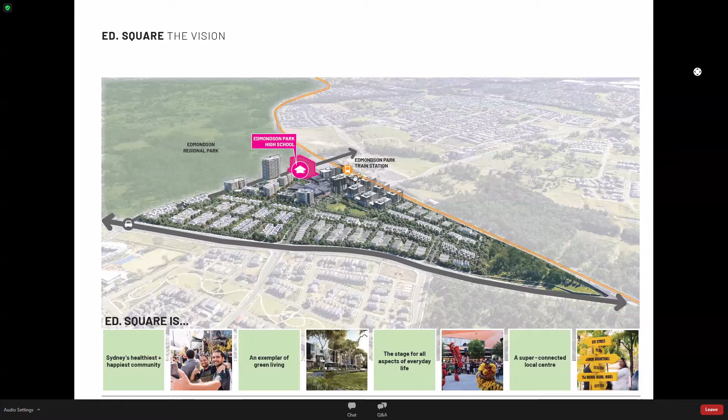I'll start by giving you a summary of the Ed.Square vision for those of you who are not familiar with our overall development. This is a 3D view of the overall master plan. You can see the orange railway line at the northern end of the site with the train station logo, and centred around the train station is our town centre. You can see with the lower level roof area, that's the town centre east, which is the operational retail centre and the apartments above. To the west of that is our town centre west future stage, and in pink there is the potential Edmondson Park High School, which is the subject of the state significant DA that we're here to talk about tonight.

Getting your bearings across the rest of the site, you can see the Edmondson Regional Park off to the western side of the site. And then in the foreground, there's various townhomes and parks that make up the rest of the Ed.Square vision.

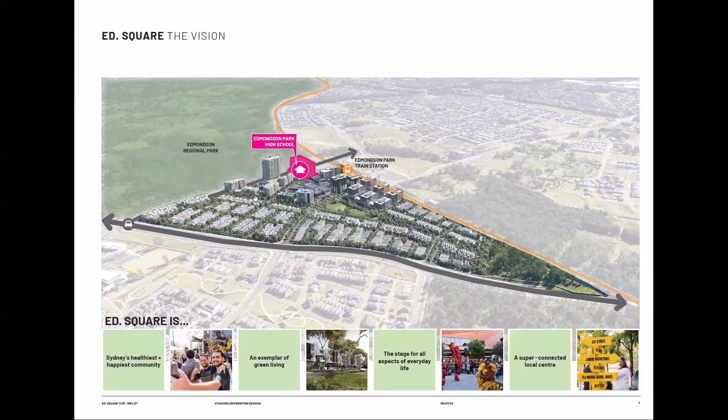Moving on to the next slide, the Ed.Square journey so far. This is the same information from the master plan on the previous slide, with a recent aerial photograph overlaid on top.

You can see here that the town centre east is operational, and town centre west in pink, which we're here to talk about, the northern part of that town centre west, which is the school site, the regional park, the station, and then the commuter car park just to the north of town centre west.

Just a bit of history about Fraser's involvement on the site. We were announced as the successful tenderer by Landcom in 2015. The first apartment residents moved into town centre east in August 2020, the first townhome residents moved into Residential Precinct 1 in March 2021, and the Ed.Square Town Square and Retail Stage 1 opened in April 2021.

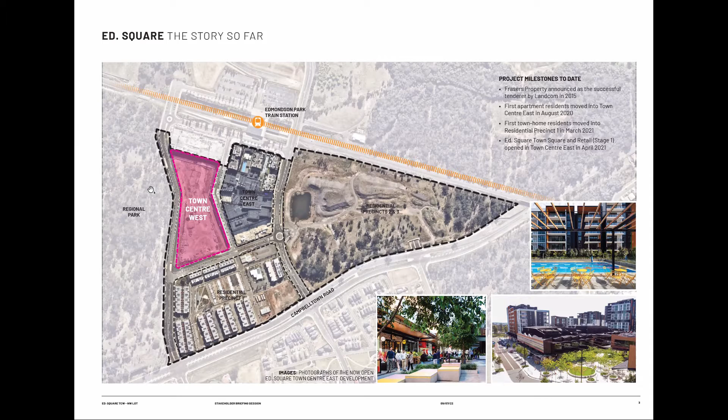In terms of what's planned and what's in the future for Ed.Square, we've worked really hard to create a vibrant community and a vibrant town square, as you can see in the photos of the town square and Eat Street. What we're looking to do is expand that offering with Town Centre West, bringing that community plaza and extending it forward towards the Edmondson Regional Park.

As part of our vision, we saw an opportunity to include a high school as part of Town Centre West. We see the high school potentially forming part of that community, contributing to the community and also informing the community.

In terms of integrating a high school into Ed.Square, we think it will really help strengthen and grow the Ed.Square community and the wider community. We're really enthusiastic about some high quality public spaces that could be provided, and the infrastructure and facilities that go with a high school in this location.

In terms of what that means for current and future families in Ed.Square, we're excited about the educational opportunities, but also the long-term investment in the local economy and the employment opportunities that come with it.

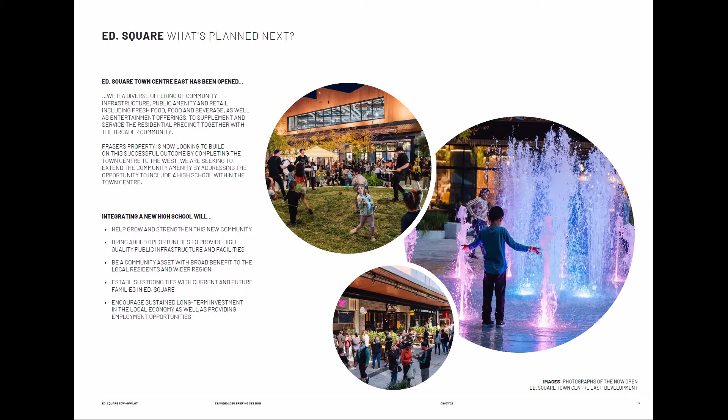I might just hand over now to my colleague Thomas Rathati, who's going to talk about some of the planning context and the history in terms of Town Centre West and the school site. Thomas. Thanks, Matt.

As some of you are probably already aware, there is an approved master plan which covers all of the development in the entire Edmondson Park South Precinct, of which the Fraser site is a component. Last year we held some community consultation, which hopefully some of you attended and can remember. Basically that was about a modification of that master plan.

The modification we were preparing then was to update the master plan to include the school usage within the town centre site, as well as community facilities, and the relocation of some of our residential product within our own site just to accommodate the school building.

That modification is still with the Department of Planning for approval, but we're now looking ahead to the next steps, which is to prepare a detailed state significant development application that would seek approval of the school building in and of itself. I might pass over now to Danny, to give you a little overview from the Department of Education.

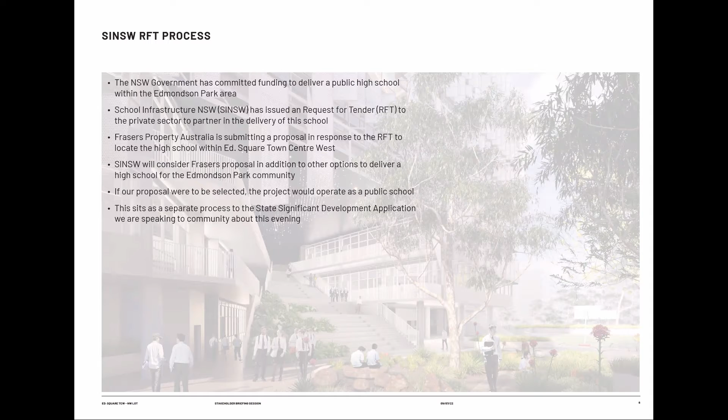Good evening, everyone. As the team said, my name is Danny. I am from the Department of Education. I just wanted to join today to provide a bit of a snapshot of what the department is doing at Edmondson Park and our involvement in the proposal that you're seeing here today.

Hopefully many of you know that the Department of Education is planning a new public high school in Edmondson Park, and funding to deliver that school has been committed in the 2021-22 New South Wales budget. As with all of our new school projects, the department needs to undertake a planning process, which includes developing a business case.

The business case always considers a range of options, so it could be a number of different sites and different types of schools we may build, or other interventions we may do. That business case is submitted for consideration and approval. For Edmondson Park, we are still undertaking that planning process. We're considering potential locations and delivery options, and the business case will put forward the one that we believe will best meet the needs of the local community and provide the best outcomes for the community and the state.

As part of this process, the department has released what's called a request for tender. That is to identify any potential private sector partners who may be in a position to deliver a public high school, maybe in an integrated development, as you're seeing here today. So this is one option that the department is considering as part of its business case. I think there's a question already in the comments about the land that the department owns.

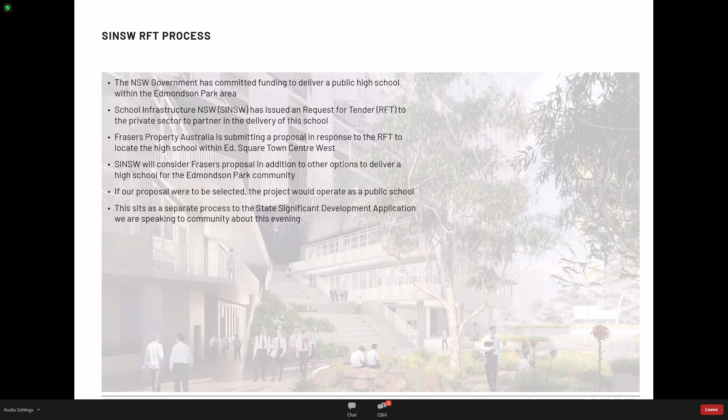And the reason the project team is not here today is because of the request for tender process I mentioned, to ensure that we have that impartiality and separation between that team and Fraser's during this process. I think that's it from me for now, and I'll hand over to Tom.

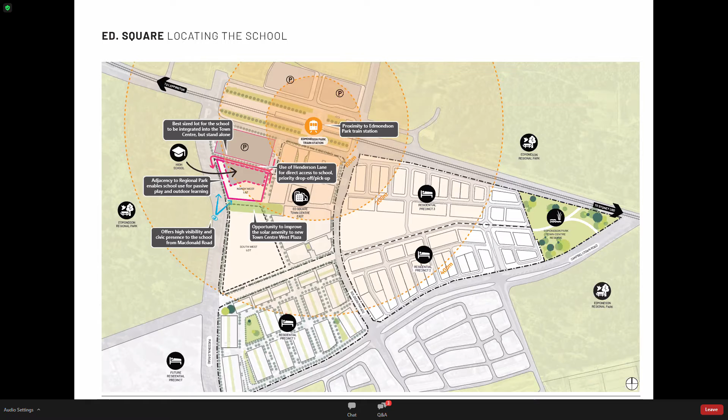And then obviously the location of the high school within the town centre provides great visibility and a real civic presence for the school, and its visibility from Macdonald Road.

There's also another entrance proposed to the existing basement car park already established under Town Centre East, which is proposed to be extended across through under Town Square West.

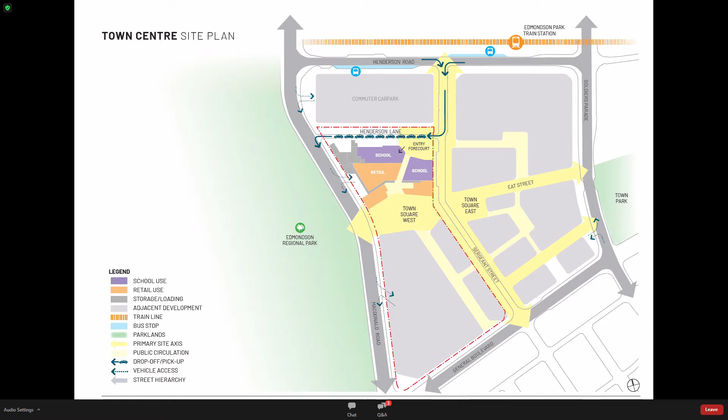Here we just give a sort of snapshot overview of the project as it's currently proposed. As you can see in the image, it's a school tower sitting on a quite generous podium area of terracing outdoor play space that incorporates sports courts and a lot of landscaped areas for outdoor passive and active play at lunchtime for students.

So it is a mixed use development. There's a level of retail proposed at ground level, with dedicated school use from level 1 up, and it is proposed as a 10-story development. The project has been designed with a capacity as a high school for 2,040 students across the 10 floors, with a number of school facilities in there.

It has been designed to align with the Department of Education's educational facilities and guidelines in terms of the high school curriculum. Key facilities include the indoor multi-purpose sports hall with a competition size basketball netball court, another one of those on the podium at level 1, as you can see in the image, and then additional outdoor passive and active play spaces.

There's an auditorium, a lecture theatre space, and a number of specialist spaces the school requires, including wood and metal workshops, art studios, a food technologies unit within the school, a fitness lab for PE, computer and science labs, and the school library. The way the scheme's been developed is to integrate itself within the town centre to maximise potential for community use of school facilities.

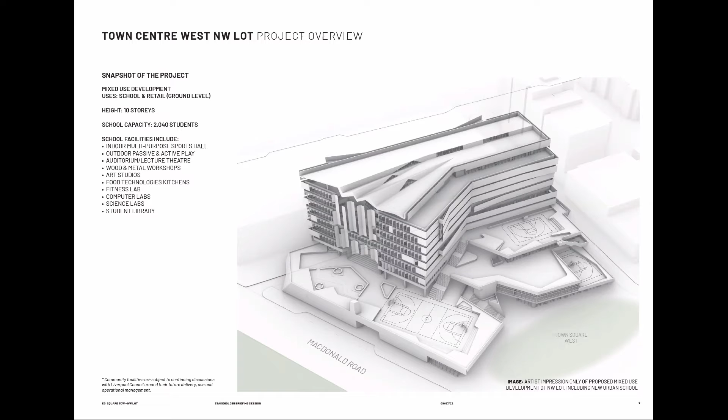So there's a key connection point here from the level 1 podium down into that extended Town Square West. The intention is that outside of school hours, there's potential for the community to engage with the school and use some of those facilities we've talked about.

This slide is just a perspective render of the approach to the school front door from the train station to the north, walking down Sergeant Street towards the town square, with the existing Town Centre East retail on the left-hand side of the image. In the middle you can see the entry forecourt with the school front door, and directly above it the indoor sports hall with the basketball and netball court facility, and then the commuter car park on the right-hand edge of the image.

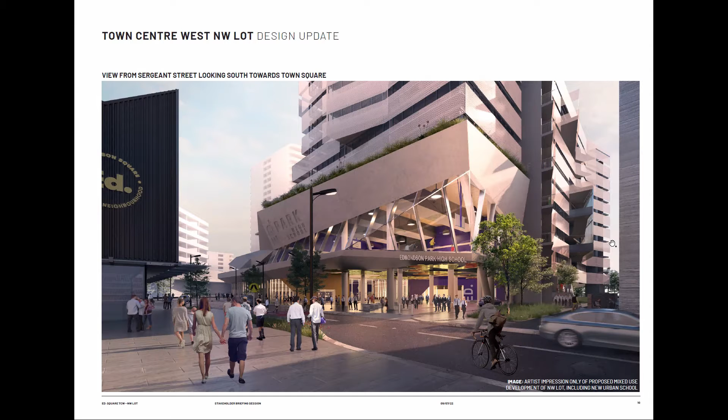This image is from the town square, the new proposed Town Square West, looking back north towards the school building. You can see the podium edge there, and that stair connection I referred to before, connecting the level 1 podium outdoor play space directly back down to the new Town Square West.

In the center of the image, that's the internal link shown in the site plan, heading back to the school front door, and then the connection back up to the train station and the bus stops to the north.

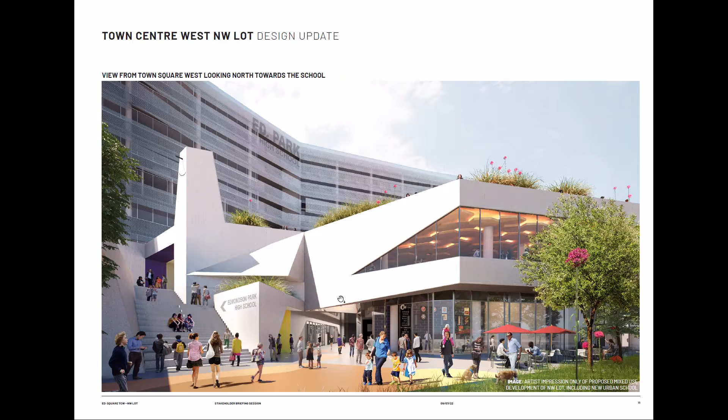This is a plan of the level 1 slab of the school proposal. So from the west moving east, that's the proposed landscape zone at the base of a large amphitheatre that enables students to gather, and the outdoor sports court.

Again, with the ideal of community integration and use of these facilities outside of school hours, there are some additional covered outdoor play spaces, and a connection linking to the indoor basketball netball court and change room facilities and storage to enable alternative uses outside of school hours. So that's just one of the levels of open space within the school.

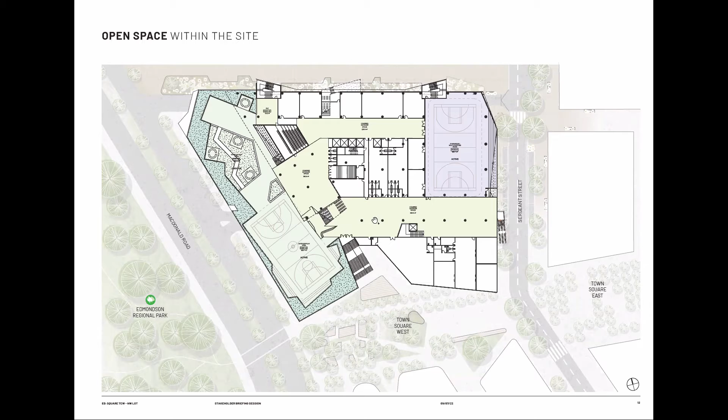The scheme on the school site itself aligns to the open space requirements and guidelines from the department on a high school and what an urban school model should provide. As we go to the next slide, there are a number of additional opportunities we've looked at in terms of enhancing that open space quality and providing additional open space for students to use.

There's the town square we talked about, directly adjacent to the school site, providing a great opportunity for additional open space connecting directly into the school. And then a signalized crossing proposed at the end of that town square, crossing Macdonald Road, to enable use of areas within the regional park, and also a connection to the Zouch Road playing fields further to the west, all within easy walking distance of the school site.

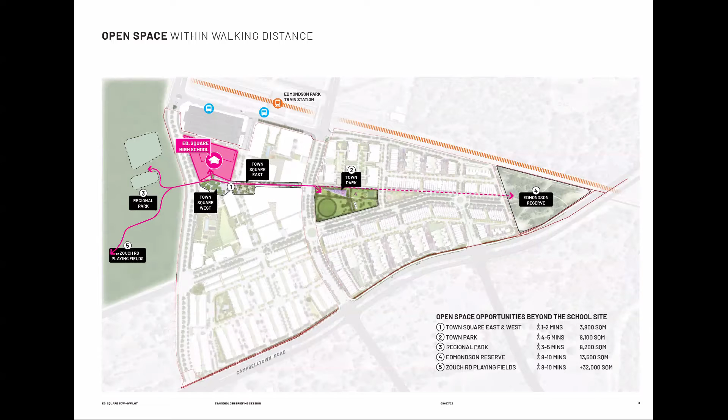The proposed town park to the east is also another opportunity we're looking to explore—a number of additional sites in walking distance from the school that enable potential school use within certain times.